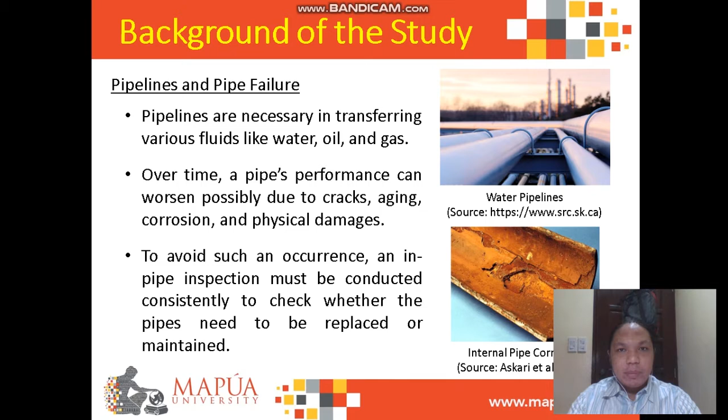In-pipe inspection is a task that can be challenging for humans alone to accomplish, since there are pipes with diameters so small that it would be impossible for humans to inspect the interior. This is why in-pipe inspection robots are being developed to make in-pipe inspection easier, as the robots would be equipped with necessary equipment needed for movement and data gathering.

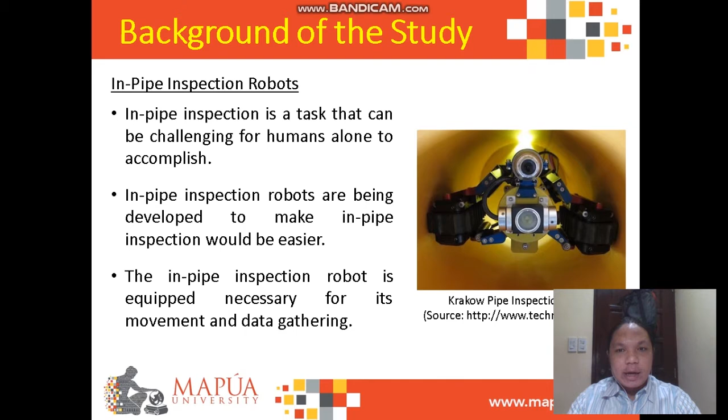In testing, horizontal pipes are commonly used since the robot size doesn't need to match the actual diameter of the pipe. However, with vertical pipes, the challenge is greater because the robot must climb the pipe while carrying its own weight at a certain speed to complete its task.

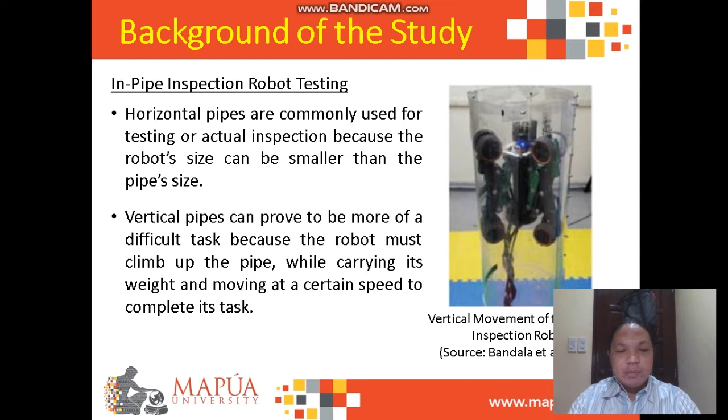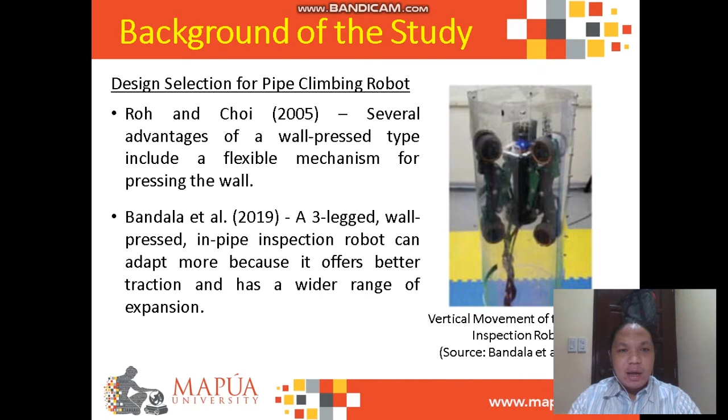In designing the pipe climbing robot for this study, the authors reviewed several literatures. Here are two authors who say that a wall-pressed type is more advantageous in pipe climbing since it has a flexible mechanism and offers better traction.

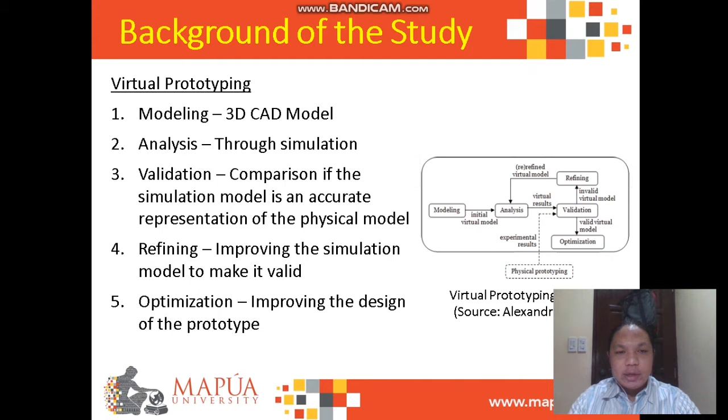The study involves mostly virtual prototyping, and we found from our research that there are 5 steps: first, modeling using CAD software; analysis through simulation; validation to check if the simulation model is an accurate representation of the physical model; refining if the simulation model is invalid; and optimization to improve the design of the simulation model.

The study will mainly use Adams, a software that tests virtual prototypes such as robots on a macroscopic level. The software incorporates real physics, and the simulation results can include the system's displacement, velocity, and reaction forces.

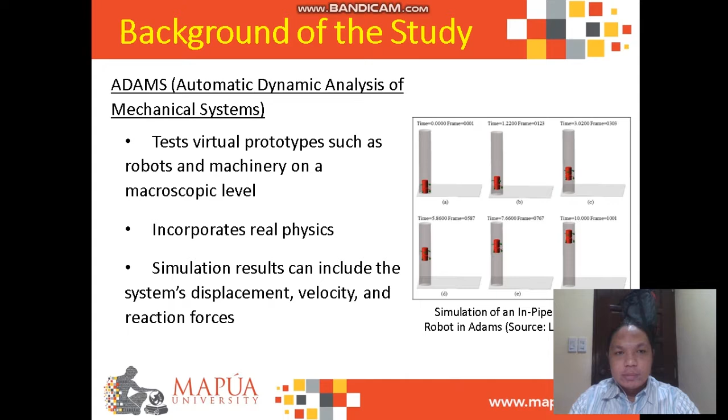So what is the significance of this study? Based on a previous study done by Kagalpin et al., they conducted and fabricated a pipe inspection robot. However, the design is only limited to 10 to 12 inches and horizontal pipes.

The authors of that study recommended creating a pipe inspection robot that can climb vertical pipes and fit smaller pipe sizes, which we, the authors, have done.

Another significance of this study is the need for virtual prototyping before fabrication, because fabricating a robot like this may come as costly. Virtual prototyping is a way wherein engineers can plan first on how to build their system and understand it, so that when they fabricate it, it will be less costly.

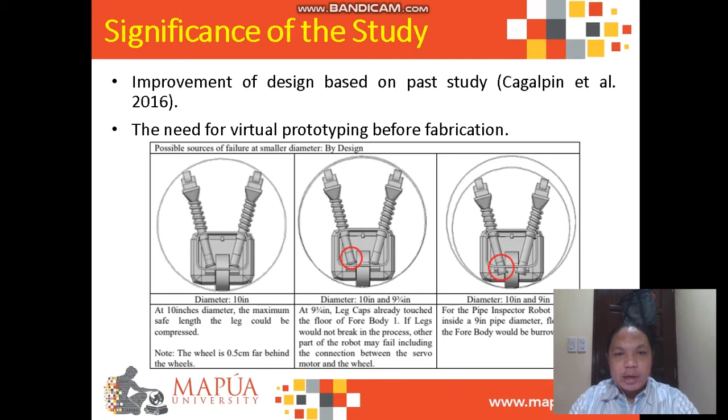As seen in the picture here in the presentation, these are the possible sources of failure analyzed by the authors of the previous study on why their robot cannot fit smaller pipe sizes less than 10 inches.

The specific objectives of this study are: to design the improved pipe inspection robot design in Autodesk Fusion 360; to model and simulate the motor circuit of the robot to determine if the chosen components are operational; to create a simulation model based on the previous study to validate whether the virtual prototype to be made in Adams is accurate to the physical model.

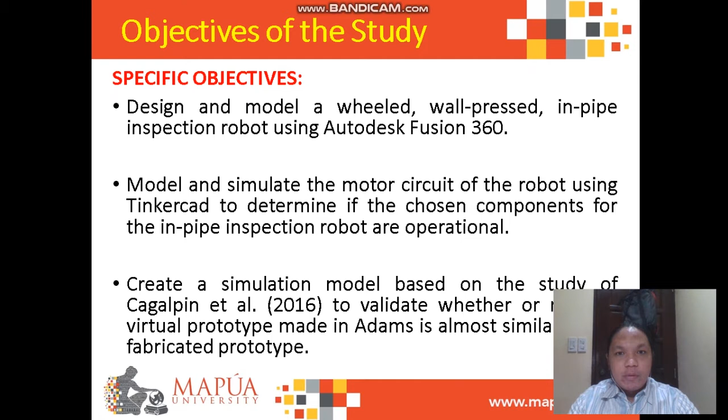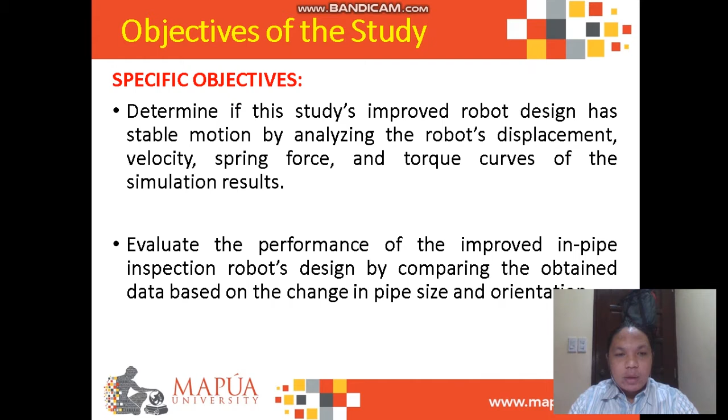To determine if this study's improved design has stable motion by analyzing the displacement, velocity, spring force, and torque curves; and lastly, to evaluate the performance of the improved design by comparing the obtained data based on the change in pipe size and orientation.

So here is the methodology. First, the researchers reviewed related literature, then designed their own pipe inspection robot based on what they read.

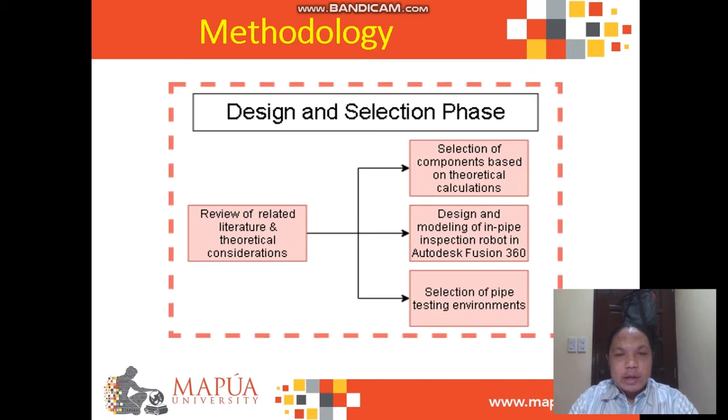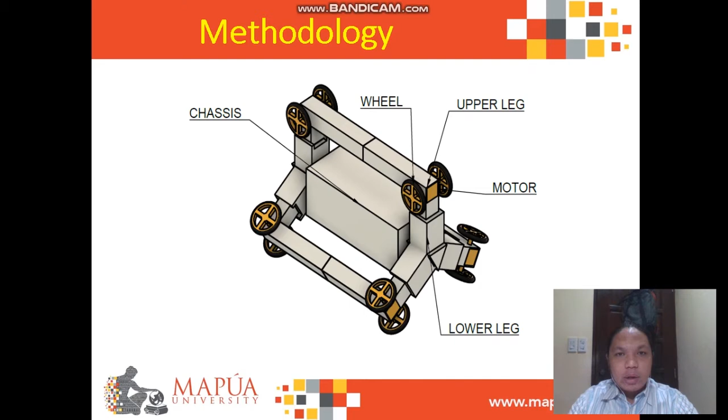Here are the selected components of the pipe inspection robot overall, and here's the design of the improved in-pipe inspection robot based on the chosen components.

The important materials to be obtained in this study are the spring and motor, which would be dependent on the weight of the robot.

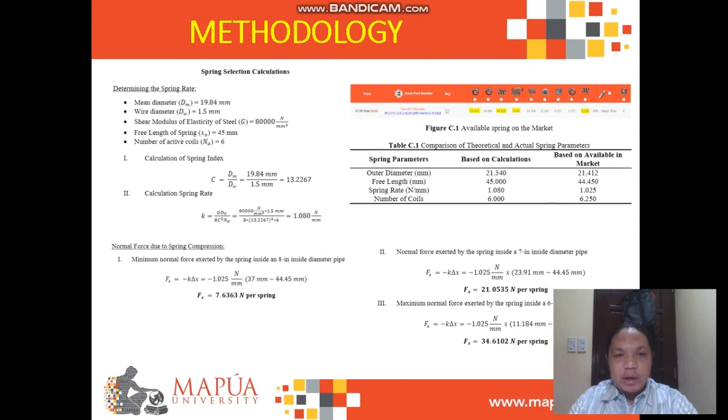Here are the calculations in getting the spring. In getting the spring force, we would need that for our stress simulation test. Here's the calculation in selecting the proper motor for our robot.

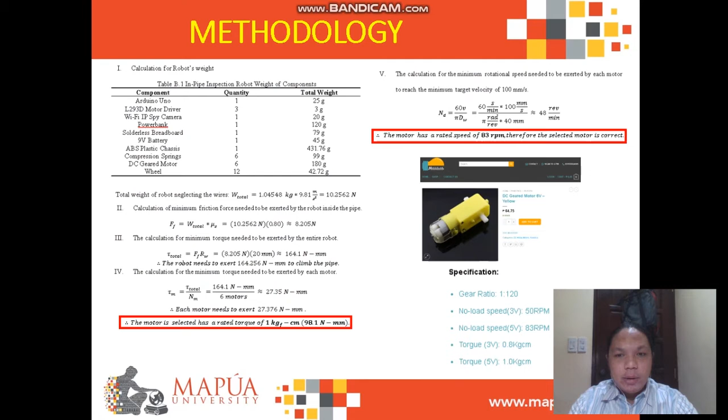Next is the validation phase. This is necessary to check if the virtual prototype made in Adams would be an accurate representation of the physical model. That is why the researchers made a simulation model of the pipe inspection robot from the previous study.

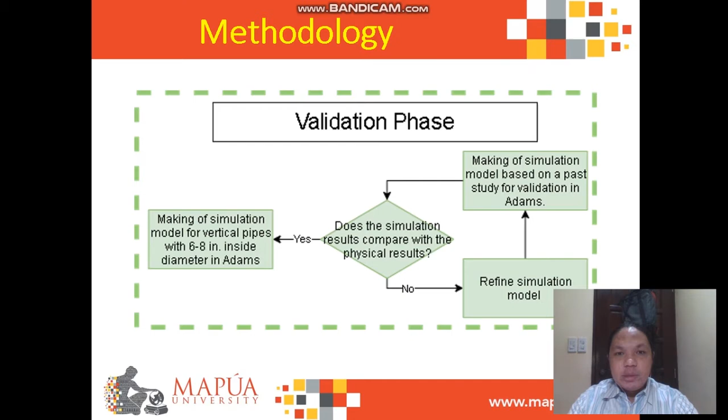They made the robot based on the parameters given in their manuscript, as seen in the slide, and the mass would be either input through user input or determined by geometry or material type.

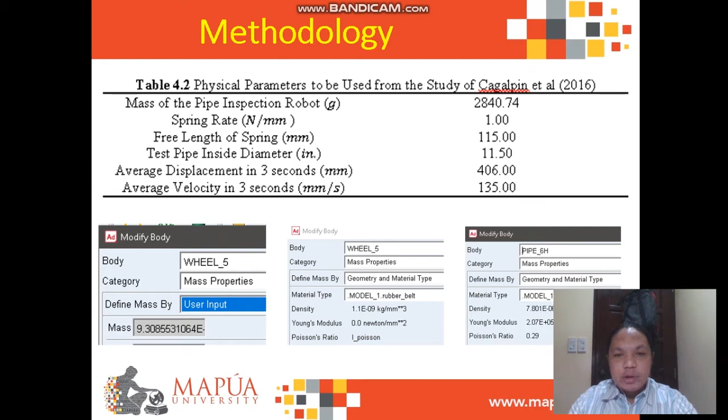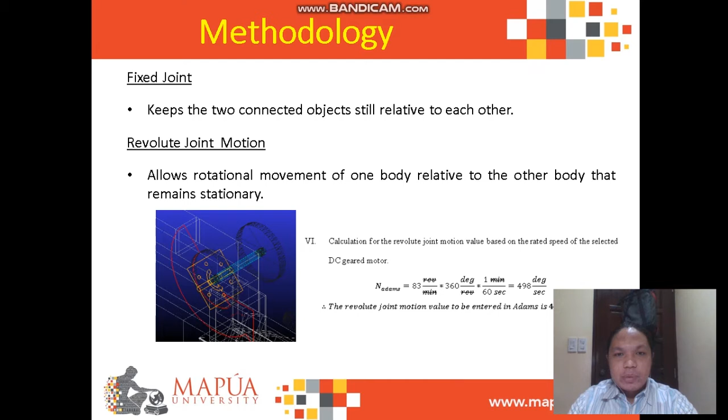The simulation model would include necessary constraints such as fixed joint to keep the objects still, revolute joint motion to allow rotational movement, spring damper to serve as the connector, and contact force to keep the solids in contact.

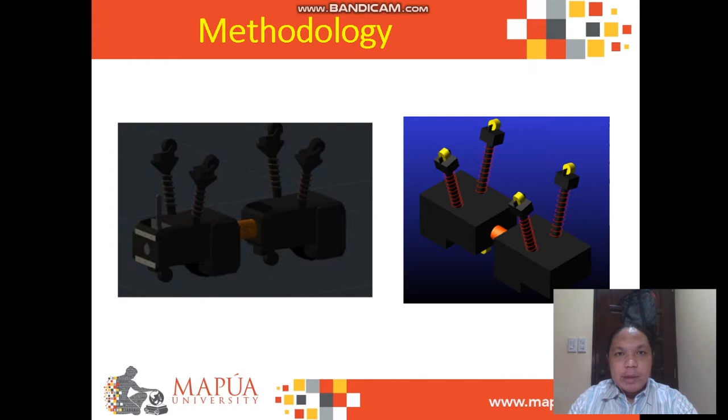Here is the simulation model that the researchers made based on the previous study. On the right is the simplified model. For the motion simulation, the end time would be 3 seconds as done in the previous study, and the step size would be 0.001 seconds to better visualize higher frequencies of response.

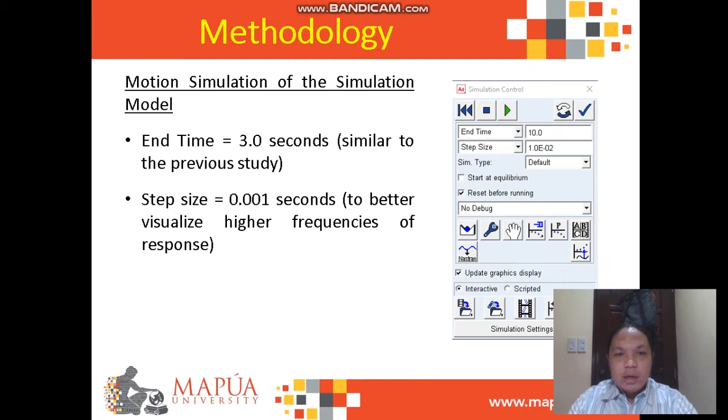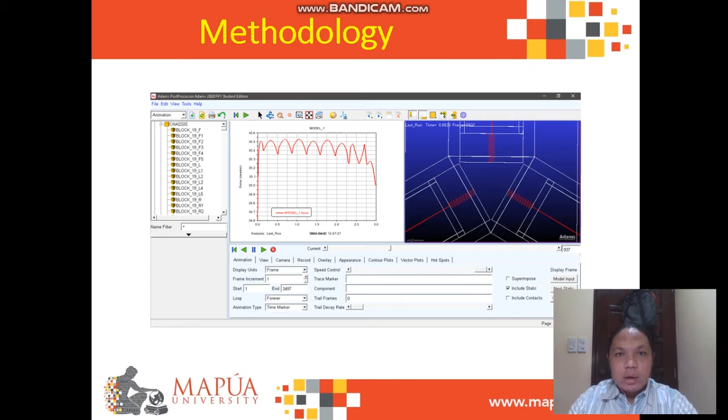Here is the simulation as seen in the pictures, and the results can be analyzed in the post processor, wherein the curves can be analyzed alongside the animation to completely see where anything has gone wrong.

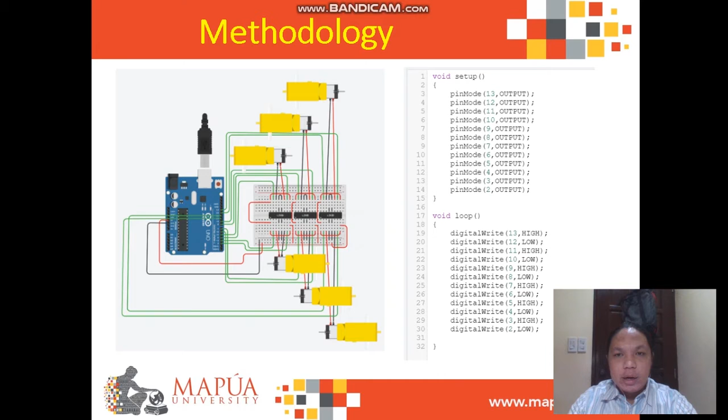For the circuit formation phase, we simply used the software to create the circuit, coded it, and simulated it to see if it's working or not.

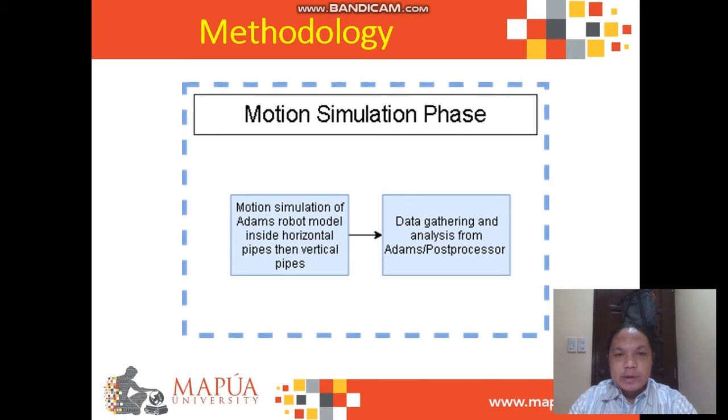For the motion simulation phase, it is similar to the validation phase, but only using this study's improved design of the pipe inspection robot. Here is the simulation model of our improved design.

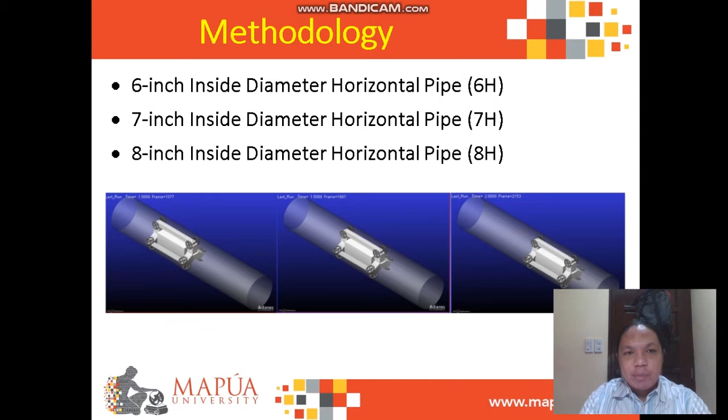So next are the pipe settings. The researchers have decided to test the simulation model of the improved design in 6 pipe settings: first in horizontal pipes per pipe size, next in vertical pipes.

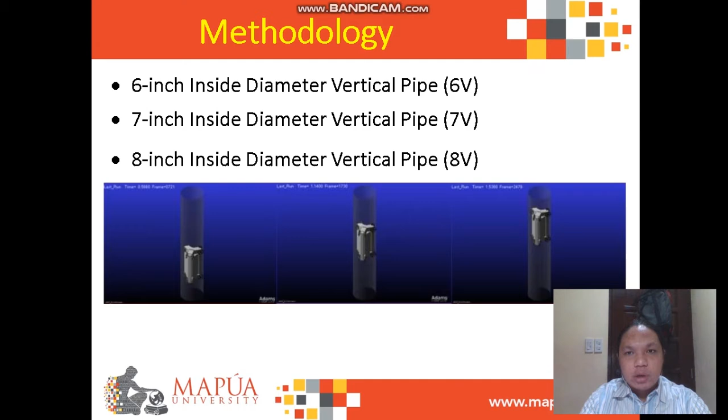As seen in the pictures here, it is shown that the simulation model was able to climb vertical pipes, but we will see in the results whether or not it is stable.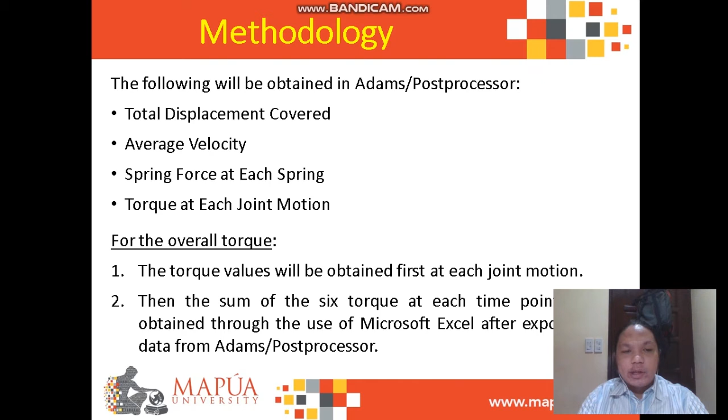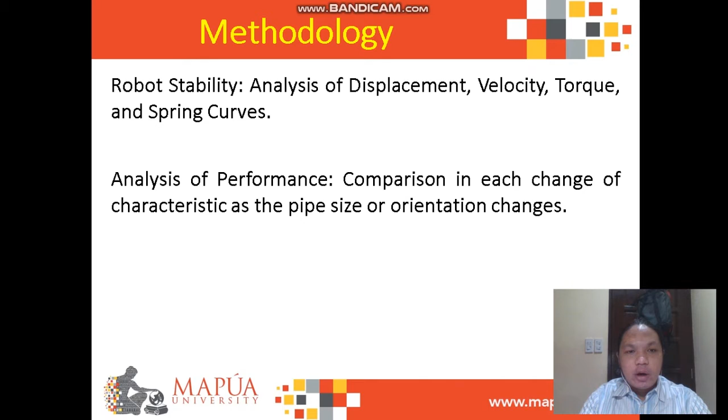For the overall torque, the torque values will be obtained first at each joint motion, then the sum of the 6 torque values at each time point will be obtained through Microsoft Excel after exporting the data from Adams. So what we will analyze here is the robot stability through the curves and the performance of the robot through the change of characteristics based on pipe size or orientation changes.

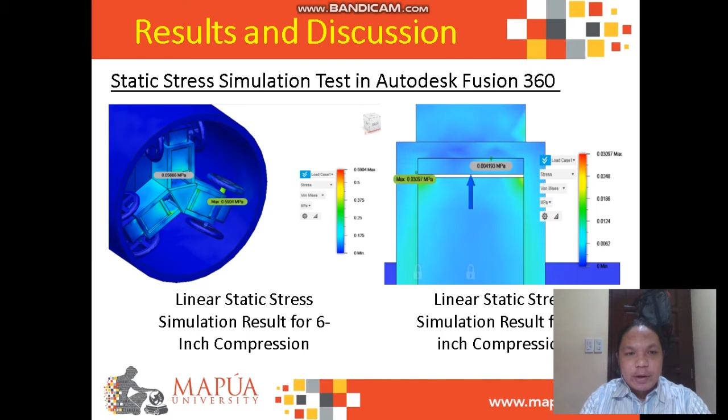For the resultant discussion, through static stress simulation, whether the design experiences minimum or maximum compression from the spring force, there is no significant deformation. Using nonlinear static stress simulation with the maximum spring force, the researchers have deemed that the design is acceptable as it would not experience significant deformation from the spring forces.

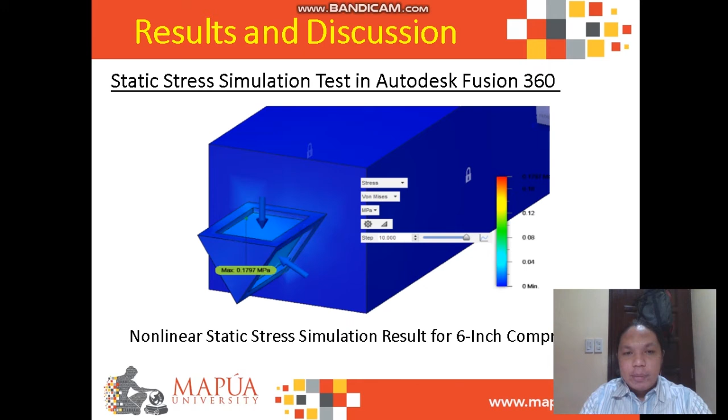Next, simulating the motor circuit in Tinkercad. When the code was run in Tinkercad, the motors displayed an RPM of 143 RPM, but that is not the actual speed of the motor, it only shows that the circuit is working.

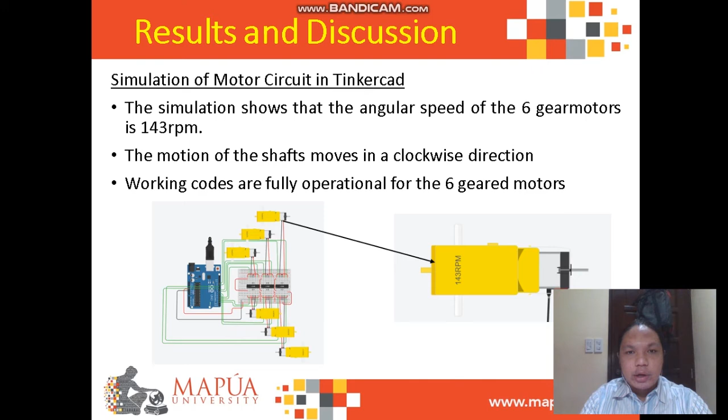Based on the simulation done in Tinkercad, the researchers can conclude that the chosen components for the motor circuit are operational. For the validation simulation based on the previous study, as seen in the slide on the curves...

The robot was able to create a straight, almost smooth motion of its operation with slight shocks due to friction. Comparing the physical results and simulation results, there's only a small percentage of error, which leads the researchers to conclude that Adams is a valid method for creating virtual prototypes, which we would need for the improved design.

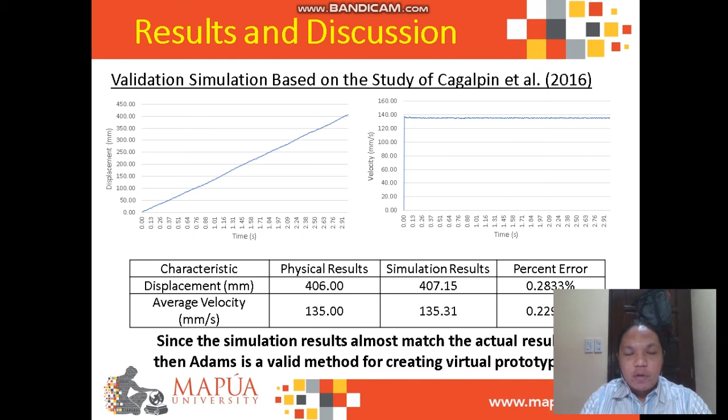So next, the results for the improved design. First, for the motion simulation: at first, the researchers discovered that the torque had an extremely high value at 0 seconds, but we discovered that the robot was not fully pressed into the pipe until 0.057 seconds.

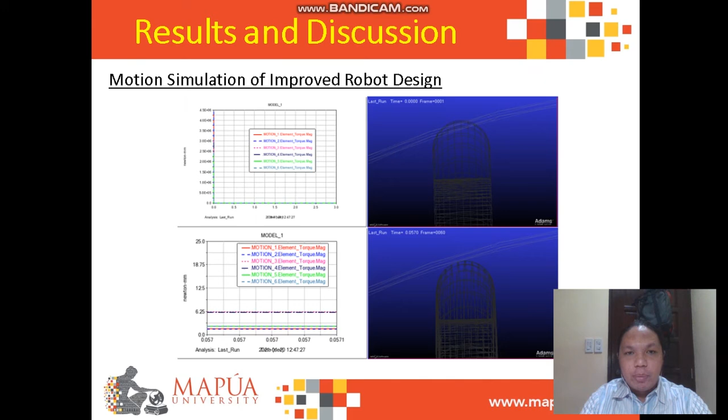That is why it was necessary to export the data after the simulation, change the values to 0 at 0 seconds, and disregard the data between 0 and 0.057 seconds.

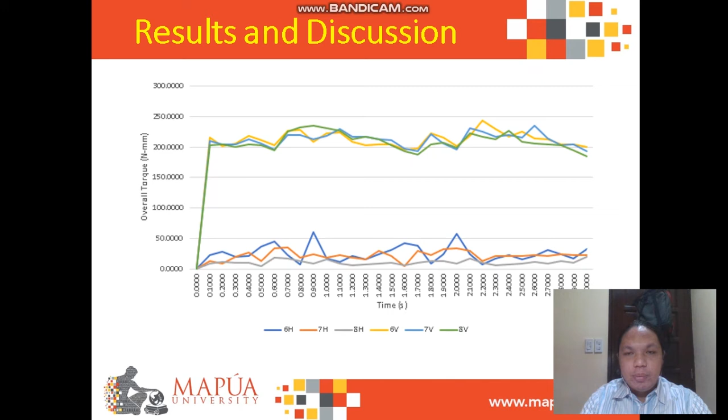In the torque, there are a few shocks which should be explained in the analysis later. And here in the spring forces, as seen in the horizontal and vertical pipes, these follow a pattern-like curve.

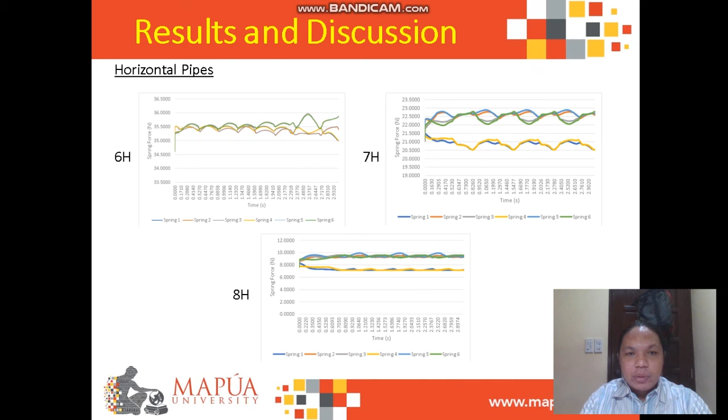From the analysis, the simulation model's motion is almost smooth based on the curves, and small shocks are seen in all four curves, which are due to the friction between the wheels and the pipe, the resistance from the spring forces, the slight rotation of the model from its initial position, gravity during the pipe climbing operation, and adjacent springs that affect each other's movement, which is why the spring forces show pattern-like curves.

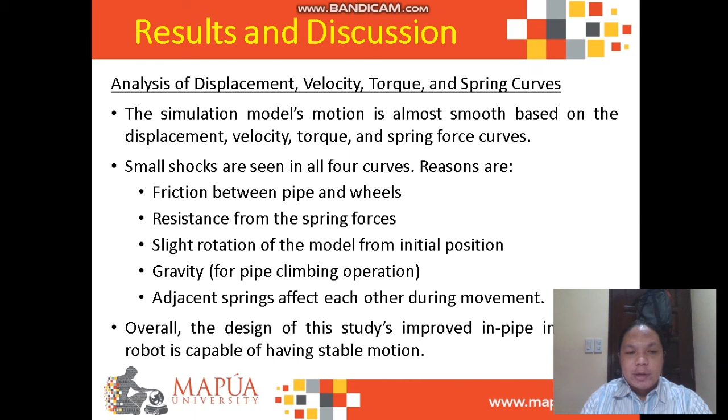Despite that, overall, the design of this study's improved in-pipe inspection robot is capable of having stable motion upon operation.

So here are the changes in the characteristics when the pipe size or orientation changes. As seen here, even when the pipe size or orientation changes, there is not much significant change to affect the robot's performance.

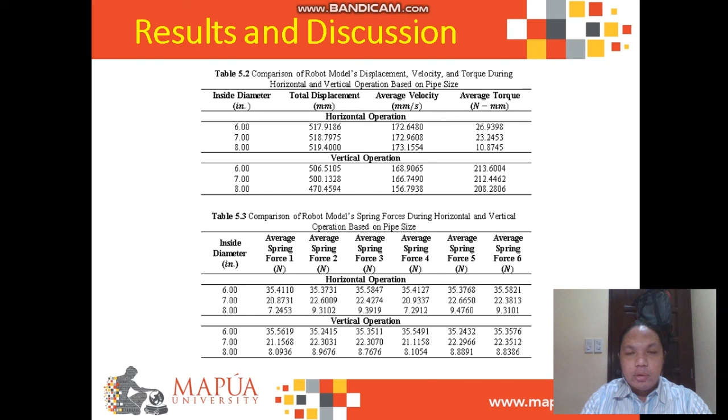This is good, because if the characteristics were large enough to affect the performance, the researchers could not conclude that the design is better than the previous design.

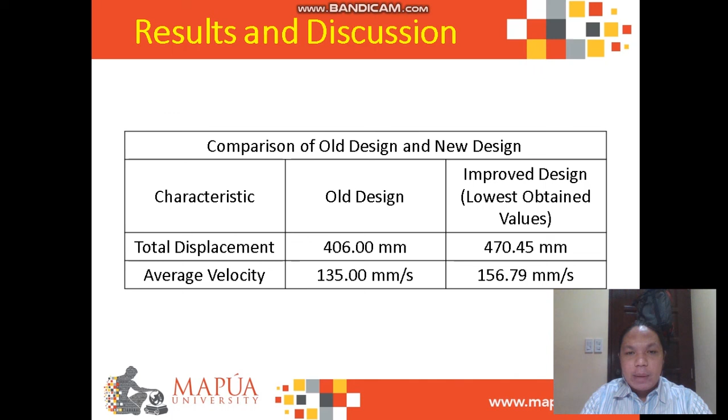Seen here in the comparison of the old and new design, by comparing the values from the old design and the new design from the lowest obtained values, the researchers have concluded that the improved design has a faster operation time, which is good for fast pipe inspection operations.

For the conclusion, the researchers have concluded that the robot design in Autodesk Fusion 360, the improved in-pipe inspection robot design, experienced no deformation from the stress simulation, which deems that the design is safe for operation. The motor circuit based on the chosen components were operational as well, which leads to the conclusion that the motor circuit based on the chosen components are correct.

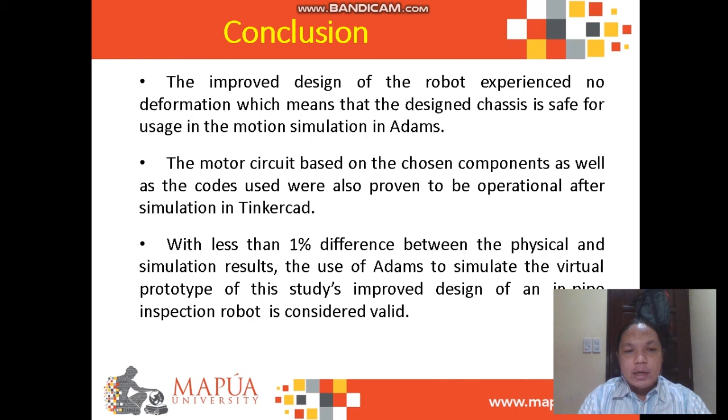With less than 1% difference between the physical and simulation results, the use of Adams to simulate the virtual prototype of this study's improved design is considered valid. From the analysis of the four curves, it has been shown that the improved design can travel in horizontal and vertical pipes with stable motion.

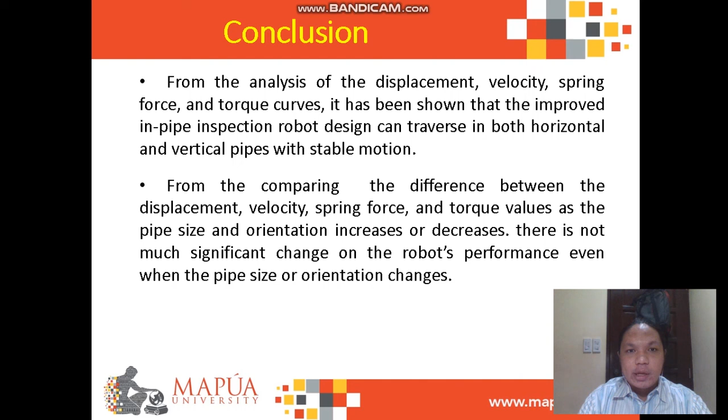From comparing the difference in the four characteristics based on pipe size or pipe orientation, there's not much significant change affecting the robot's performance, even when the pipe size or orientation changes. That is all. Thank you for listening.